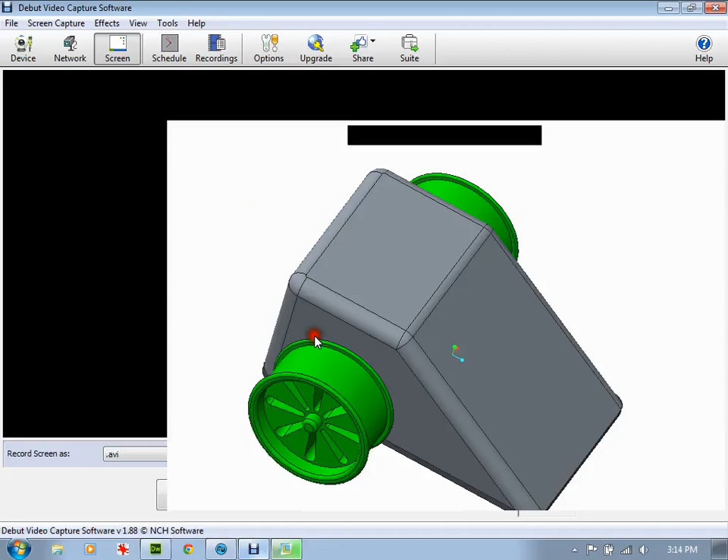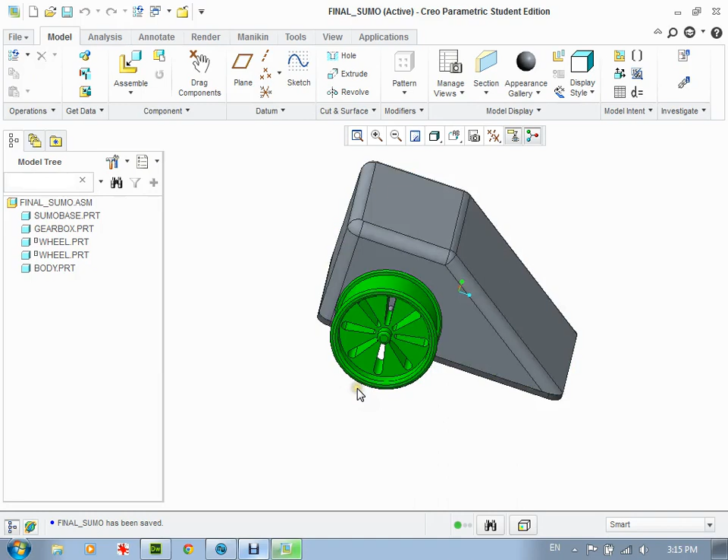Hopefully this is the last part of the tutorial on how to design the SumoBot. Basically what we're left with is this design here. You can design it any way you want, add spoilers, headlights, air intakes. You could even have this design cover the wheels, but it's completely up to you.

So what we're going to do now is a couple things. One is we're going to add, on the top of this, a strain relief, a hole for where the mouse cord is going to go to control this. I'm going to open it up, and the first thing I'm going to do is click on extrude, and go to sketch view.

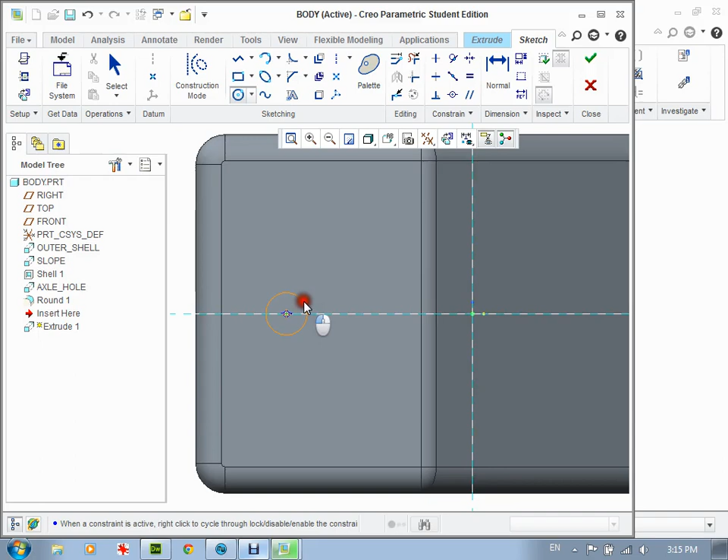I'm just going to add a hole. The first hole I'm going to do is pretty simple, just one simple one like this, rotate like this. I'm going to expand, and I only need this to be maybe 0.25, a quarter of an inch high. Now I'm going to hit OK.

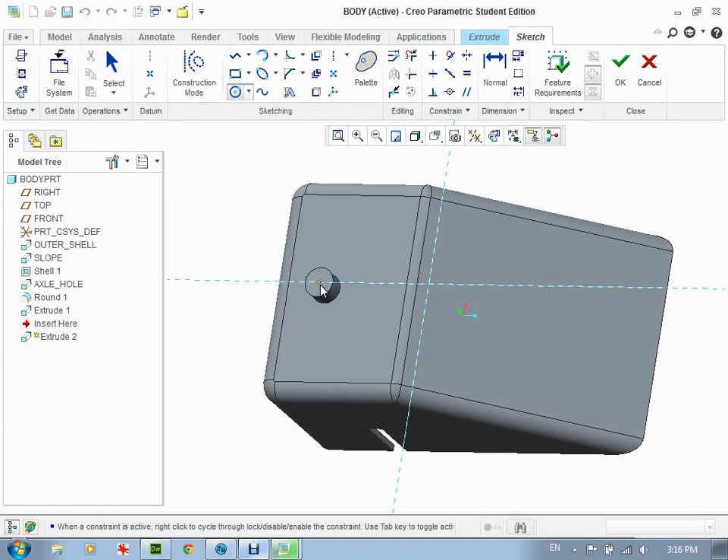Then what I'm going to do is go on top of it again, hit extrude, and make a smaller hole. That smaller hole is going to be here. Let me zoom into this, I'm going to leave it in 3D.

I'm going to hit sketch, select, and what I want is enough room for a mouse cord. A mouse cord is somewhere between 0.1 and 0.2 of an inch, it all depends on the size of the cord. So I'm going to leave this at maybe 0.15.

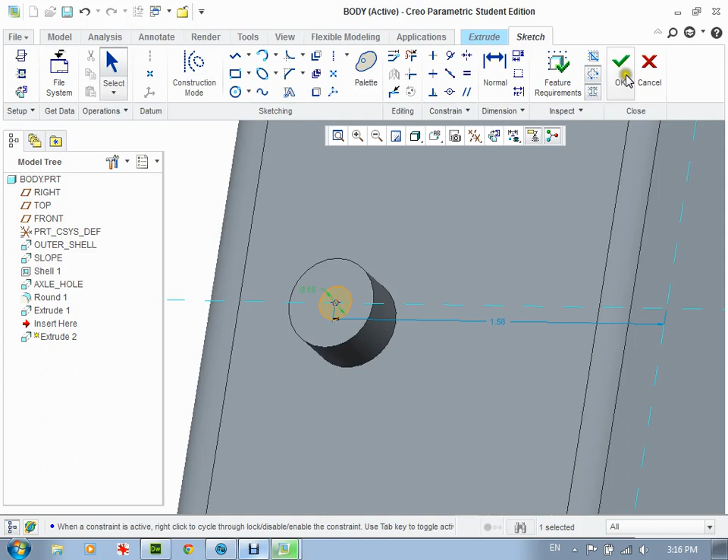Hit OK, and this time I'm actually going to go through the material, reverse it, and remove the material. Now you can see there's a hole all the way through, so that part is done.

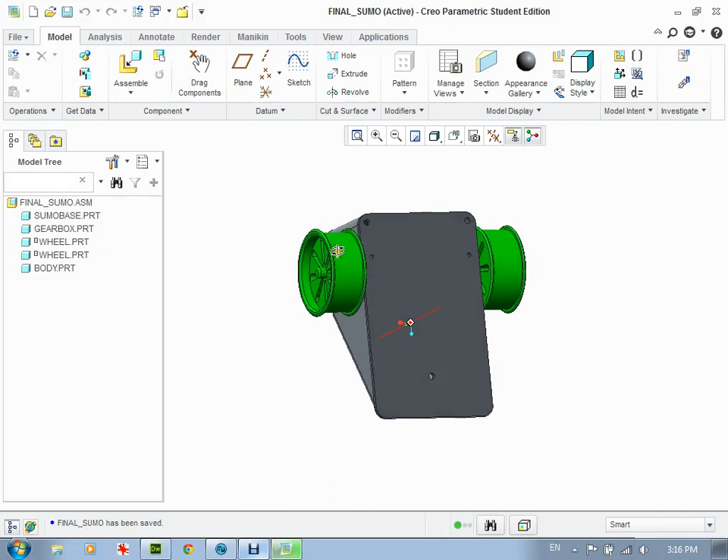Now if I just go save it, you kind of get the idea what's going to happen, close it, and now it is there. Now the last part is I need to put some screw holes, because I need to be able to screw the base and the chassis together.

And this one's actually pretty simple too, it's almost exactly like the base from earlier. So I'm going to take the body, open it as usual, go right away to the bottom view. I'm going to go to bottom, and what I want to do is add some screw holes in here.

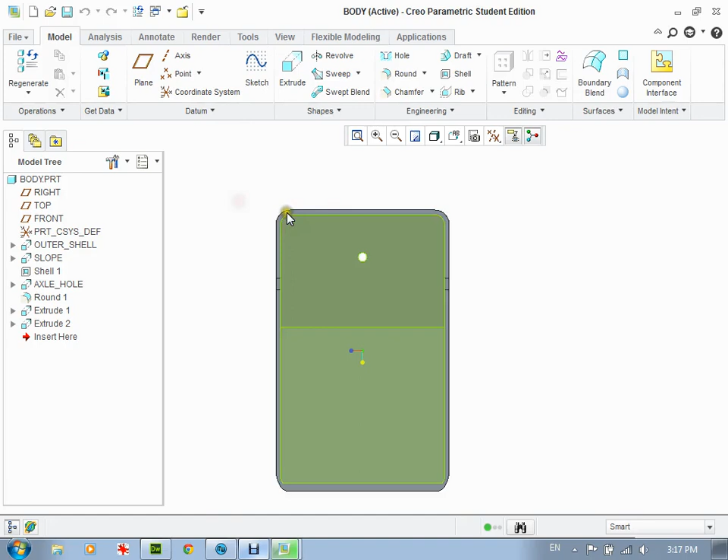Now if I remember back when, I know the distances of how far, so we're just going to go for it. I'm going to take and click this top edge—oops, let's grab this edge right there. Okay, there we go, it's dark green. I'm going to hit extrude.

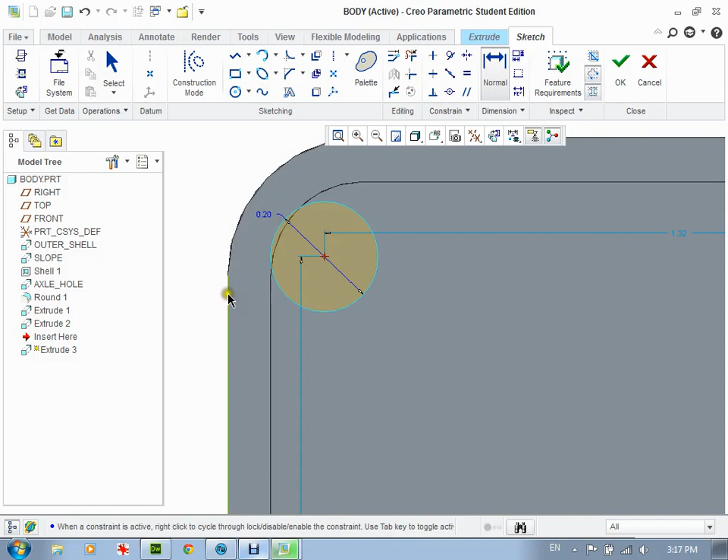I'm going to add one hole now, and I'm just going to put it out here. Because I've done everything the same way, it lets me do this pretty good. So I'm going to go 0.2 is my hole, and now I know from here to the edge in my last one—if I go to normal, I know from here to here on my chassis was 0.2, so I'm going to put 0.2, and I know that from the center to up here was also 0.2.

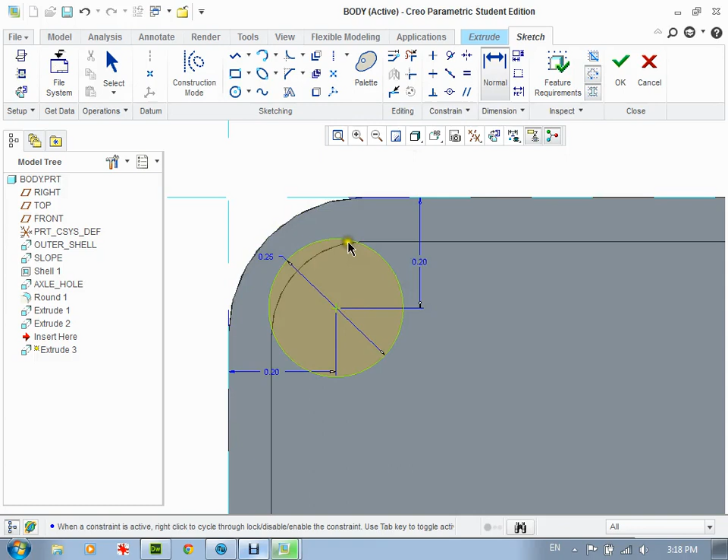Now I do this and I see that hole really isn't meshing with the edge yet, so I'm going to change this to maybe 0.25. So there we go, so it kind of gets a good meat in there to actually hold it in place.

Then what I'm going to do is take it and say, okay, I want it to go—mirror it. So I'm going to add a center line.

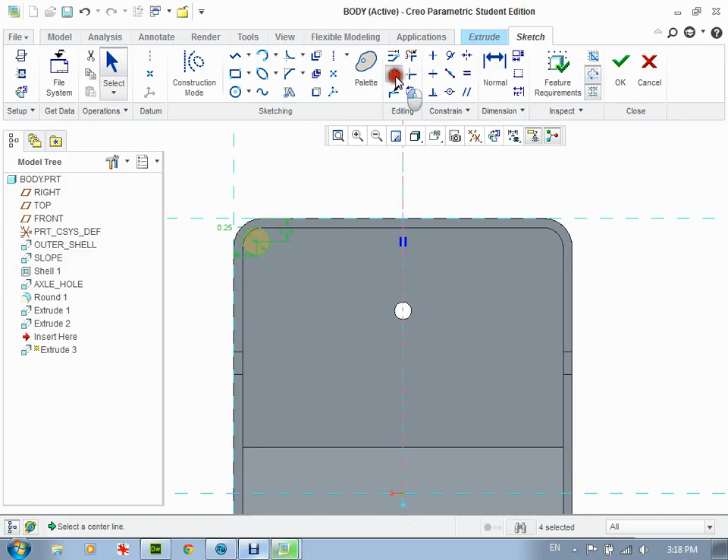Okay, there's my center line. So now I can select this guy, and I can go mirror across the center line. And I might as well right away while I'm doing this, put the third one in. So I'm going to go down here somewhere, and I remember the distance.

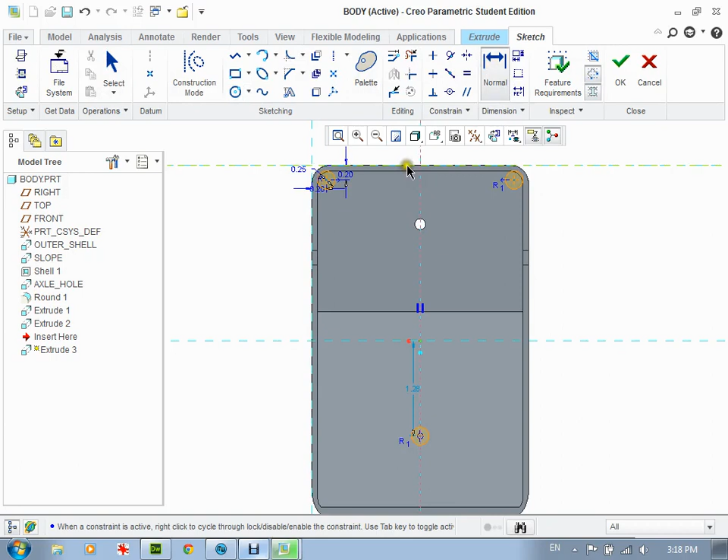First off, I'm going to make it the same size. I'll go select, and I remember the dimension from the top here to the center of this, it was 1.28. Put 1.28 here, so it puts it in place. I'm going to hit OK. Now I got those holes.

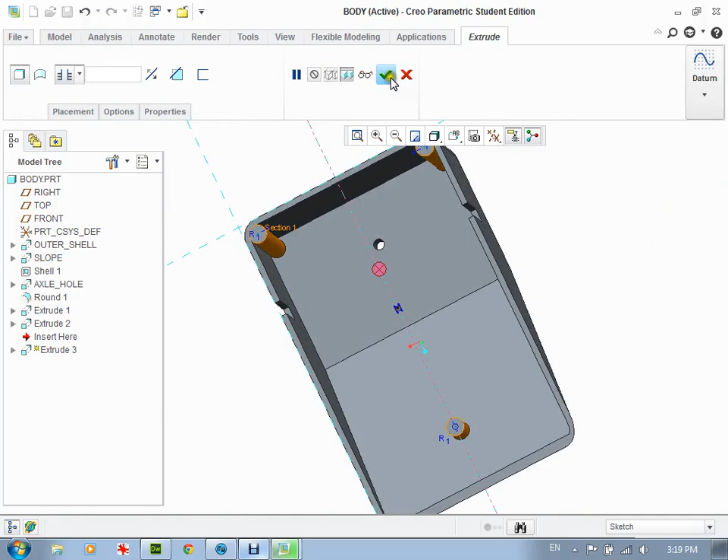I'm going to reverse the direction, and instead of remove material, I'm going to make it go through to the bottom. Now what that does, it doesn't bring it out through the other side. I'm going to hit OK. So there's my holes there for screwing down in place, and then I'm going to do exactly this one again.

So I'm going to select this top surface. Whoops, hang on a second. Let's select the top surface. Try that again. There we go. Let's zoom into here somewhere else. There we go.

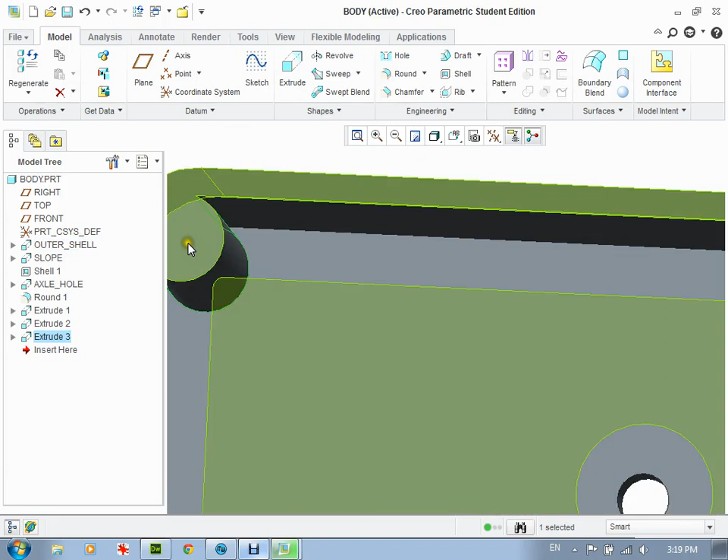I'm going to do an extrude, and make the holes for the screws to go into. The holes for the screws happen to be, and now you see I got no displays on, so I'm going to turn my displays on, axis on. Now I can draw a circle basically right on that axis.

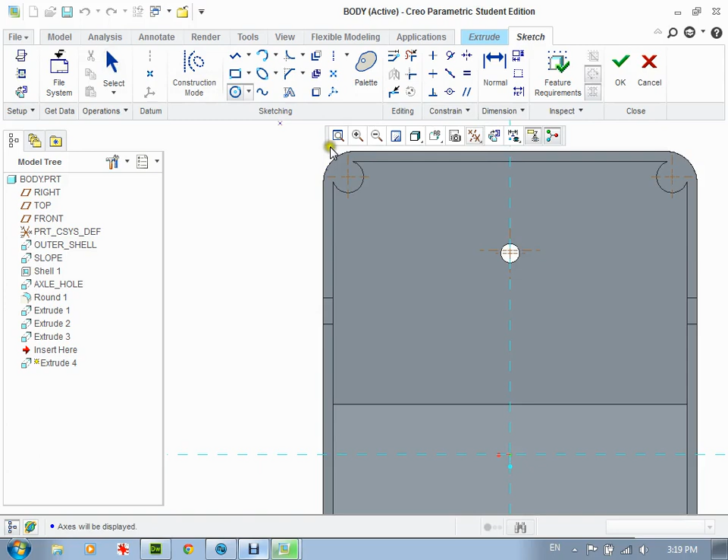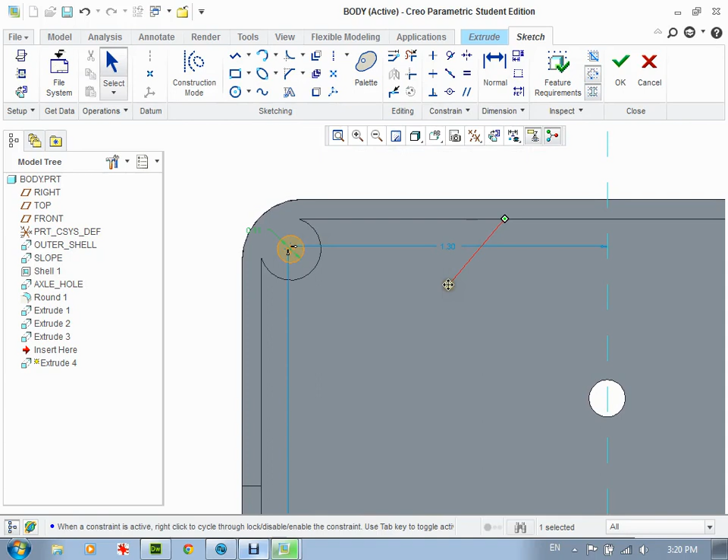If I hold the Alt key down, nope, I'm just going to go to the center. So zoom in, and right in the center there, I'm going to say that's supposed to be 0.11. Once again, I'm going to take that and do my dimension, go from this edge to the center, and I want it to be 0.2. I want to make sure I do this, because if I don't, you can actually mess things up if you start changing them.

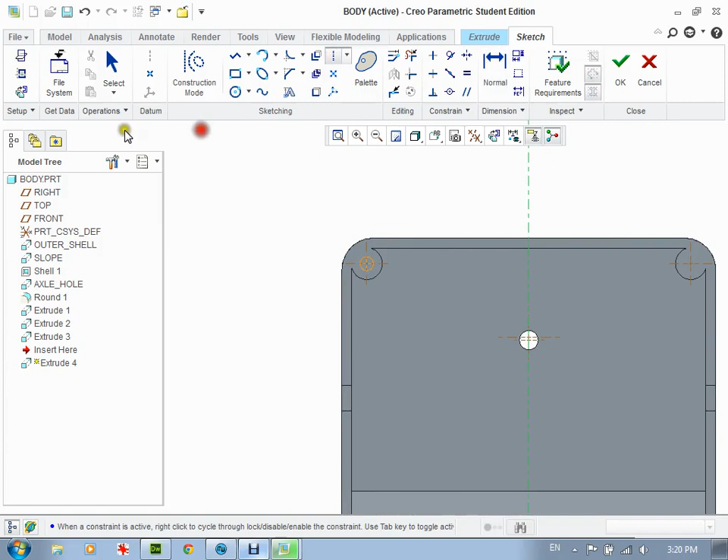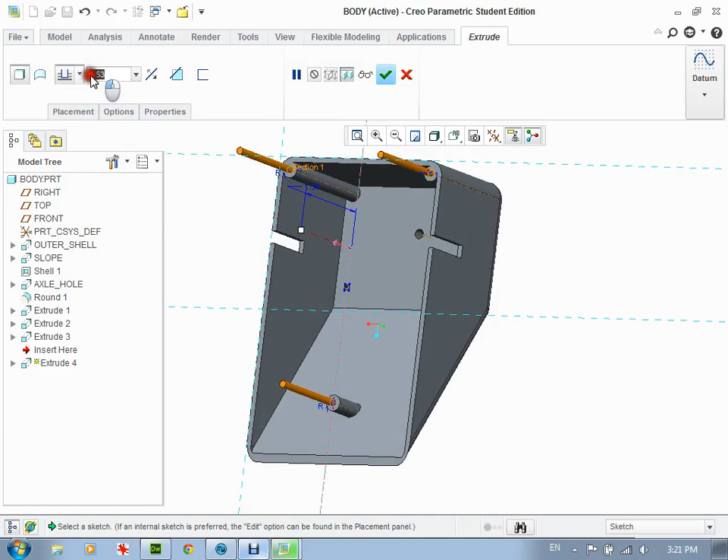Now my screws are only half an inch long, so I'm going to go 0.5, and change direction, remove material. I'm going to make sure that didn't come out the top. No, it didn't. I'm going to hit OK. So now I have my holes to screw it down in place.

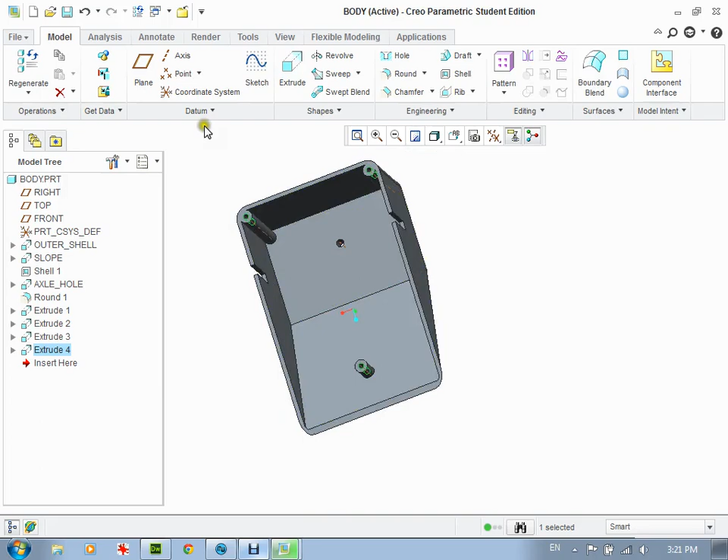If I want to make this maybe stronger or thicker, I can do that. I can change anything anytime I want, and you've figured that out by now. I'm just going to hit save. I'm going to hit close.

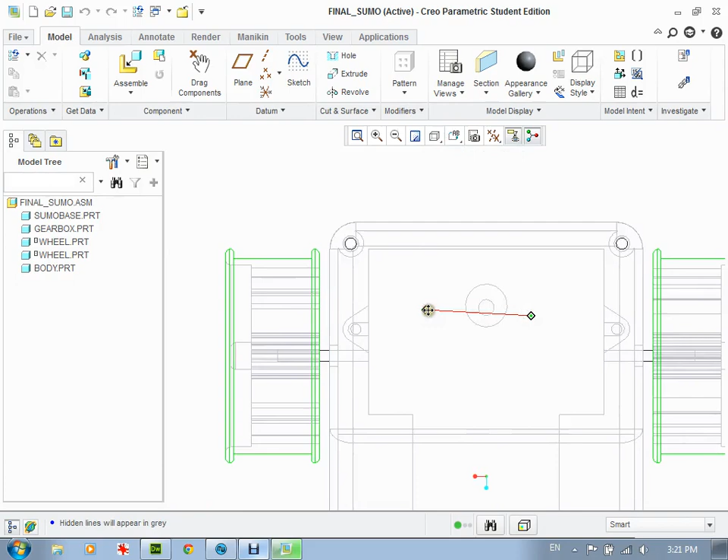And then now when I do this, I should, when I go to the bottom, I'm going to do a bottom view. When I zoom in, I should have, there you go, there's my holes. If I go and do hidden, you can see all my holes line up there. My holes line up there, my holes line up there. So go back to shading with edges, and there we go.

There's kind of my completed SumoBot. Kind of cool. Now all I've got to do is get it ready for 3D printing, which is going to be the next tutorial.